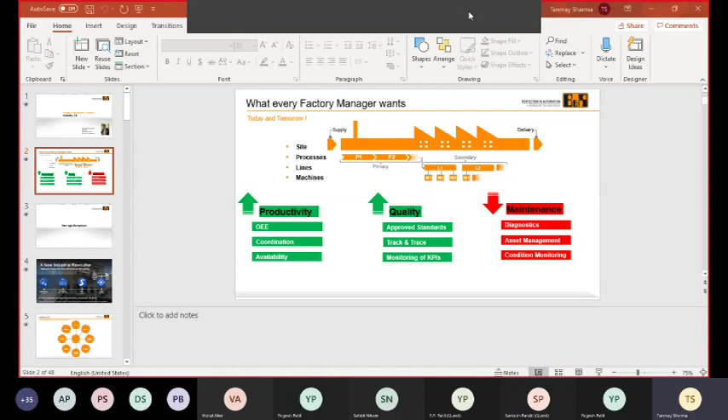Okay, thank you. So before moving ahead with our today's session, just a couple of things I would like to mention in advance. Sorry for the disturbance - there is some small construction going on near my house, so there might be some disturbances from my end. But please bear with me. I hope I'll keep this session a little bit interesting for you also, so you don't get diverted by the noise. That is the best I can do.

So thank you for giving me this opportunity to share my knowledge from the industry side with all the professors present in this session. In the next 1.5 to 2 hours, we will look at different technologies emerging in the field of automation, and how Industry 4.0 is playing its key role in industry development in today's world - especially during the last 1.5 years, during COVID, how Industry 4.0 is making things better for us in industry.

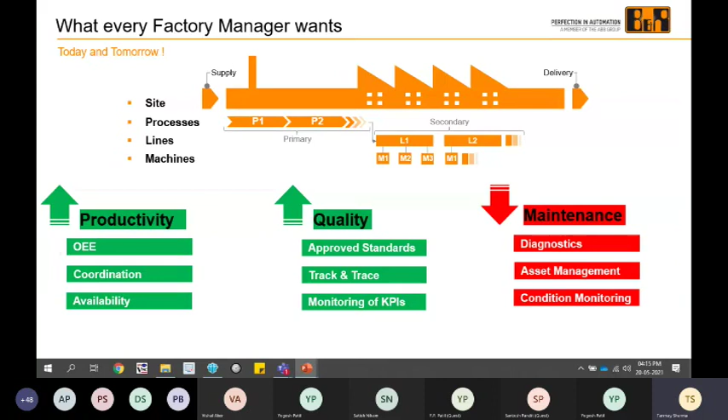Point two, I have to do advance maintenance of the machine in order to make sure it does not get shut down during the high requirement period. So these are a couple of things which every factory manager wants. Today in our presentation, we will be learning how to achieve these 3 goals by using Industry 4.0.

There was a time in the 18th century when we used to work on steam engines and steam applications, and then we moved to the mass production concept, where a single product was manufactured inside a machine without any alteration, for a huge quantity. Then came the concept in the 1970s where robotics came into picture, and mass production was converted into what I can call customized production.

I would just want to share one example. If you go on the website of Cadbury, you will get an option to customize your own gift for your friend, family, or anyone you want. Just imagine how many chocolates are being manufactured in one day. Let's assume 1 lakh chocolates. That means a machine is producing 1 lakh items per day, and all these items are different from each other. You can put a photo of your friend on that, and write a message about them, and that will get delivered to that person. So imagine, 1 lakh products manufactured in one day, and each one different from the other.

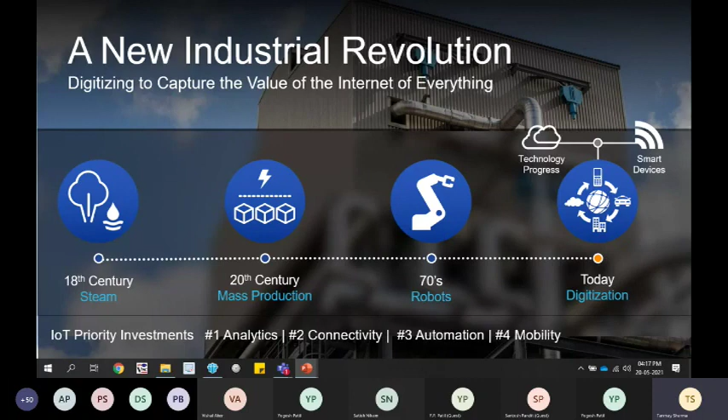There are different ways in which Industry 4.0 can help different types of applications in the industry. So we are going to discuss these basic 8 parameters through which we can take care to increase our productivity, increase our quality, and decrease the maintenance time. Let's get started one by one and see how they perform.

So first of all is scalability plus. Now, one concept here which I would like to mention to all of you, or rather a question to all of you, I want this session to be interactive, so I would expect some answers from you all also.

In March 2020, the production of sanitizer in India was 8% of the amount of production India is doing today in the field of sanitizers. Can anyone explain, let's say if 8 lakh bottles of sanitizer were produced by January or February of 2020, from 8 we moved to 100 within 1 month. How was that possible? And believe me, this was the time when there was a lockdown, a lot of companies were not functioning at that particular time. But then how were we able to move from 8 lakh production to 100 lakh within a month during the lockdown? So any suggestions, what was the concept behind that?

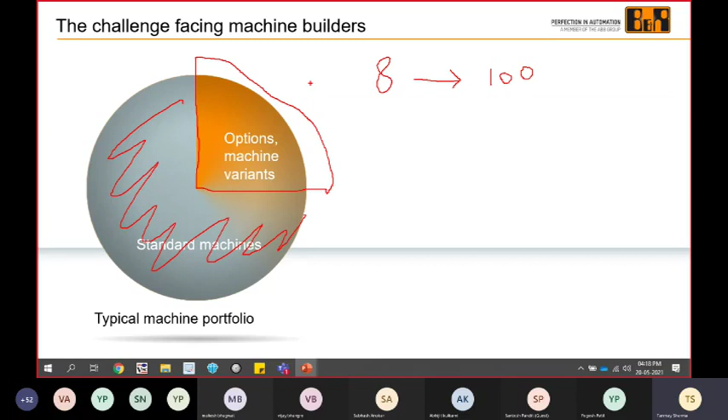So this is how the industry used to work earlier. But with time, with the concept of scalability plus, we have moved to a newer concept. And the reason we did so is, first of all, the variety of consumer products.

Earlier we used to get only one type of Parle-G biscuit in the market. Today, if we go to the market, there's Parle-G, Parle-G Gold, and Parle-G Milk. And the same is true for all brands. Earlier there was only one Dairy Milk chocolate, a simple Dairy Milk.

But today we have Silk, we have Bubbly. For Valentine's Day we have a new product, for Diwali we have a new celebration product. So the variety of consumer products coming into the market is one reason we want our application to be scalable - meaning one machine can do different tasks depending on the requirement.

The second reason is special end customer requests. Today, I can go to a Cadbury website and order a special product for my friend or family. And this is the trend right now.

If I'm working in my office today and I want to order a platter, I want specific content in my food plate. There are a couple of websites where I can choose what all I want in my food plate and order it. These are the special end customer requests coming up in the market. That is the second reason.

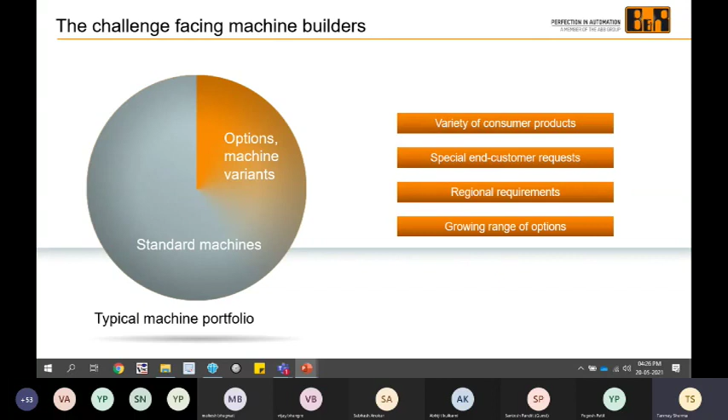So now we have moved to that particular concept where only 25% of the machine is the standard part, and the rest 75% is customizable. That means if I'm trying to make a small chocolate, I can do it with my same machine. If I want to make a big chocolate, I can do that also, and all these features are available within one machine. This is the concept of scalability which the industry is following right now, where we are focusing on not building a machine which is application specific, but machines which are concept specific.

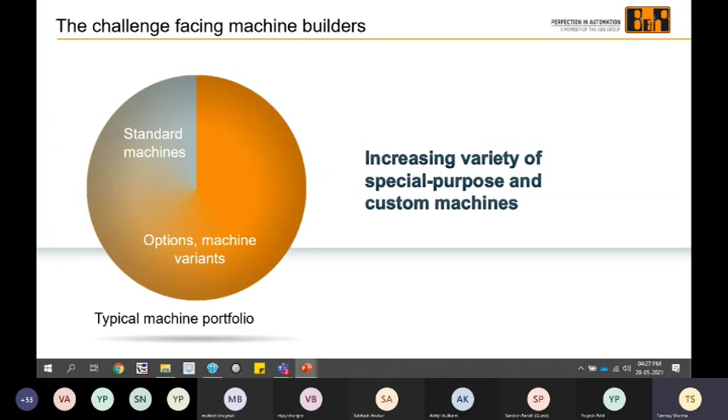So this is one area where Industry 4.0 is getting implemented, because of the increasing variety of special purpose and custom machines. Because of this concept, we were able to fulfill the sanitizer requirement. Now the concept here is that my cost of a standard machine is huge. One simple CNC machine can cost up to 5 to 10 crores of rupees.

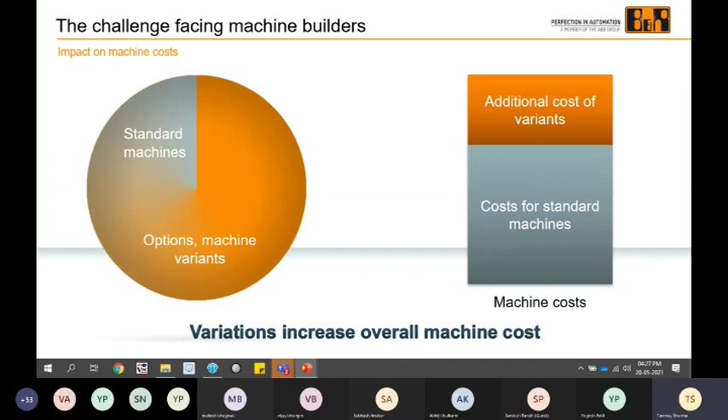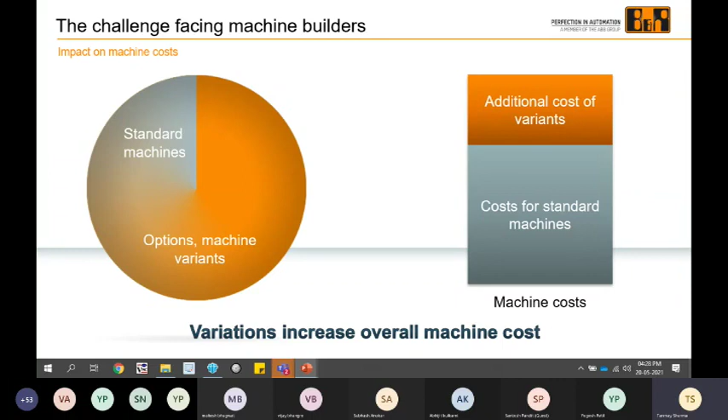So buying a new machine every time there is a new product is going to be very challenging for any factory owner. So what we do is keep the machine as basic, but the variants we change cost just a small amount compared to the initial machine cost. If I want a CNC machine to do drilling, I just change the tool in front of the CNC handle. If I want to do welding, I just change that particular part, not the entire machine. This is the concept of scalability plus, which industry is following right now.

The next and most important part is simulation and digital twin. This is a concept through which industry is trying to do R&D and testing for simulation purposes. Earlier, everyone who wanted to work in industry wanted to work on hardware, because they said the more you work on hardware, the more you learn. But today industry is again moving back to the concept of simulation.

Let's take a simple example. I want to design a motorbike. I make a layout on paper, do some sketching, and order the parts. Once my bike is manufactured, let's say I put a 50cc engine in it, though it's very low, but let's say I did it. My friend comes to me and after a test ride says maybe a 100cc engine will be good with this bike. So I order a 100cc engine, that's extra cost for me, and I fit it in my bike. I realize the performance of the bike increased.

Now because the performance increased, I want to test a 150cc engine in the same bike. Again the performance will increase, and so forth, and I will keep doing R&D. Every time I do R&D and testing of my machine, I come up with new things I can improve. But remember, because I'm developing the machine in a physical manner, I have to order every time I want to make any changes. So that is a huge cost in the form of R&D, plus also extra time, because if today I order a part of the machine, it's going to get delivered maybe in 15, 20, 25 days. So there is an extra delay.

Now, why is digital twin beneficial? First, it has a shorter TTM, that is shorter time to market. That means if designing a machine took me 1 year, today I can do it within 5 to 6 months. I can design my machine on a software, just by drag and drop choose different parts and see how the performance changes. Once I'm satisfied with my machine on a simulation platform, I can start building it on a physical level, and since I'm satisfied with the performance on simulation level, I won't have any problem with the physical machine. So shorter time to market is point one.

Better ROI, that is better return on investment. That means I have to order the mechanical equipment only one time. Whatever changes I was supposed to do, I already did in the software, in order to save money.

Higher OEE, that is overall equipment efficiency. How we increase this with this application is, let's say I design a machine and I don't even know that if I change this particular part, the efficiency will increase. I cannot play around with my R&D work if I'm doing it physically, because what might happen, let's say I'm working for a company, I order a very costly part, fit it in the machine, and realize it is not working, and the company will ask me tomorrow why did you even order this, it's a waste for us. So efficiency-wise, when doing it in simulation, there is no harm if I put any random part and check the efficiency of the machine, it might work. So I'm getting the best efficiency of the machine if I'm developing it on a simulation mode.

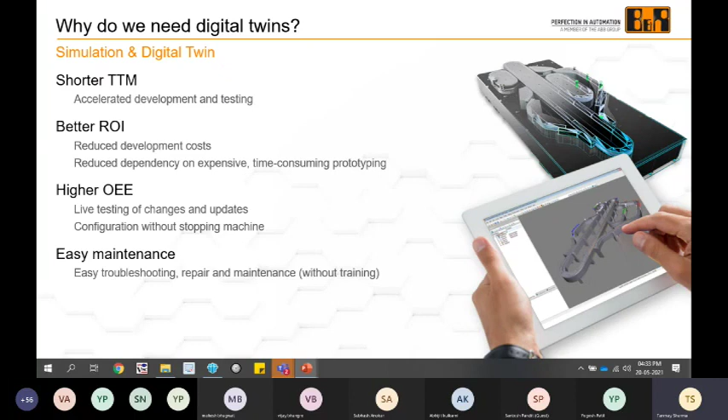So because of these advantages, the industry is moving towards a concept called digital twin. Now, when we are designing a machine on digital twin, we are generally talking about three different phases of the machine, or three different parts of commissioning the machine on simulation.

The first is visualization, that is creating the visual effects of the machine. The software we can use for this, our very own, very famous one used in our mechanical department, is AutoCAD. Very simple. Second, optimal sizing and layout.

That means I have to tell the machine, for example, if two parts of the machine are getting dragged against each other, what is the friction between these two surfaces. These are kind of the physical parameters I'll be giving to the machine. So first is designing the skeleton of the machine. Once the skeleton is designed, I have to give physical parameters to that skeleton in order to give life to that particular model which I have developed.

And the last part is the software, where I write the software to automate that particular machine. Okay, so these are the three different parts.

Now, the software which we use for all these three - first, as I mentioned, in the visualization in the early phase of designing, we talk about animations, flow of material, and collision avoidance. In optimal sizing and layout, we talk about kinematics of the machine, physics of the machine, dynamics of the machine, force, torque, speed of the machine. And lastly, software - we talk about software testing, software functioning, migrating to the real machine, and all these topics.

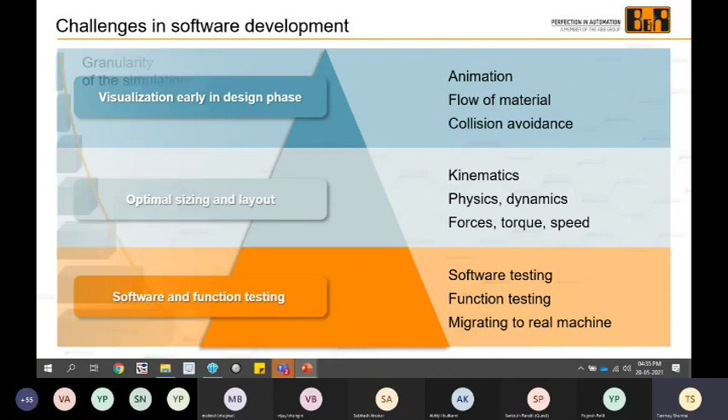The software we use for all this is kind of very common. For example, for process simulation, we use AutoCAD, we use Industrial Physics, we use DCS, CATIA, and long time back we used to use WinMod. So these are a couple of software through which we can design the physics of a machine.

Moving ahead, now there is a concept of machine simulation.

This can be done by MapleSim, by the very famous MATLAB and Simulink, and by Modelica. These are a couple of software which put life into the model we have produced. Then there is the hardware simulation part, where we run the machine in simulation mode, making the machine operational in simulation mode, and that can be done easily by Automation Studio, which is a software by B&R through which we do this particular task.

So just imagine, students who are in college, professors can give them this idea, make a team of 3 students from mechanical and 3 students from instrumentation branch, and ask them to do collaborative work where the mechanical student develops a model, and instrumentation students do the kinematic part and the automation part. So digital twin is a great concept where things are done in simulation mode.

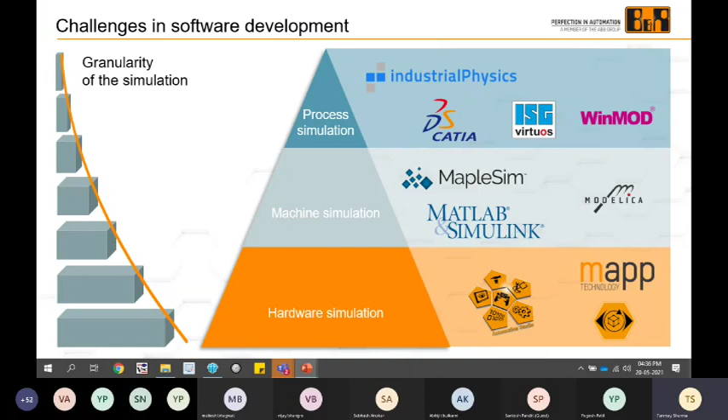So let me share one example. Recently, I think last year, 2020, we got an order from one of the pharmaceutical companies in the market. Because vaccination was going to be a huge thing in the market, there was a high demand for injection-making machines. So we got an order to design a machine which can do this particular task.

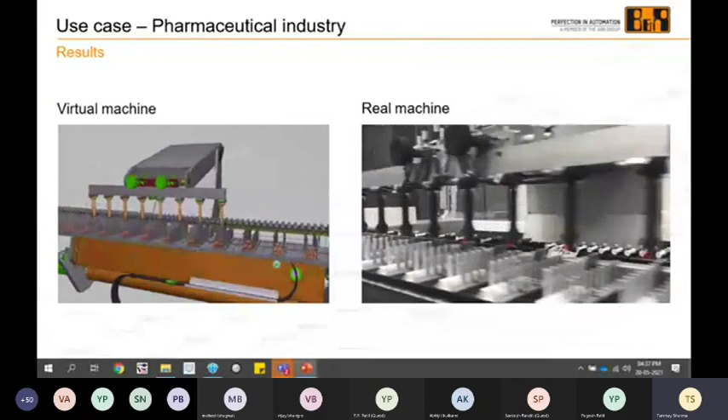So what we did is that before manufacturing the actual machine, we tried to make a simulation mode of the machine. For example, what you can see on your screen towards the right hand side, we have a real machine working, where palletizing is happening. A robotic arm is picking up and placing injections in the packing tray.

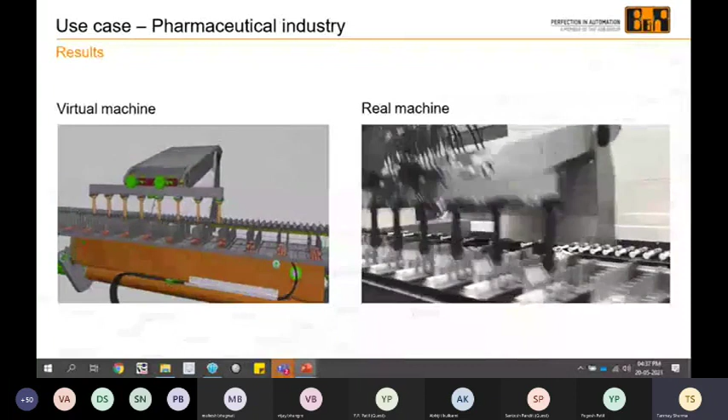But before designing this real machine, we designed the simulation of this using iPhysics, using MATLAB, using Automation Studio. We designed the same. And after doing all this testing on the virtual platform, we went ahead and created a real machine in a single shot, without any R&D needed on the actual hardware. So this is one application I can tell you about.

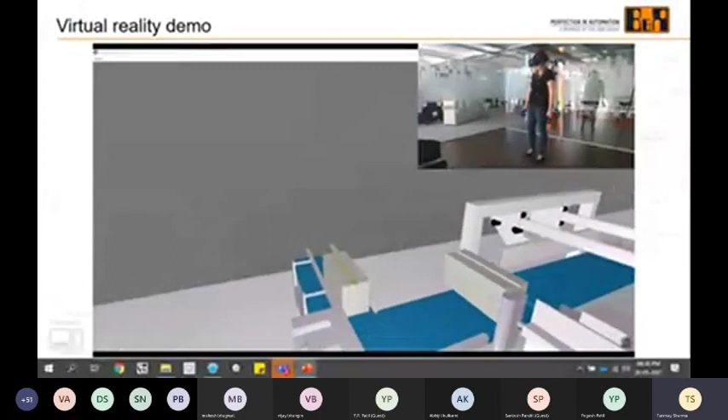Now this is another application where a person is using digital twin in addition to AR and VR, that is augmented reality and virtual reality. Without the presence of a machine, the person is able to test this particular setup. And not only test, you can pick up and place the boxes, you can do alterations, you can change anything required in real time. So this much amount of complexity digital twin can handle.

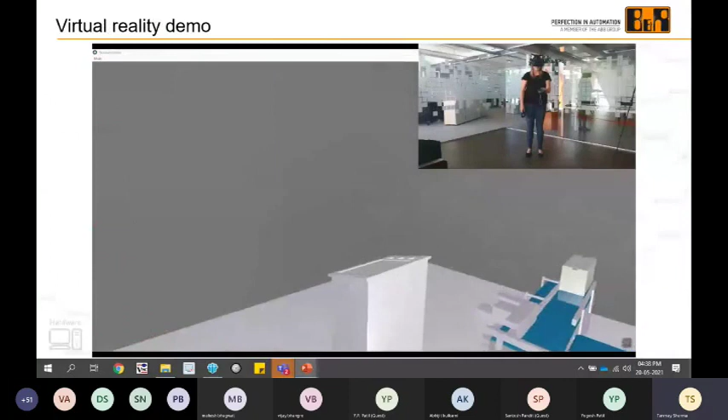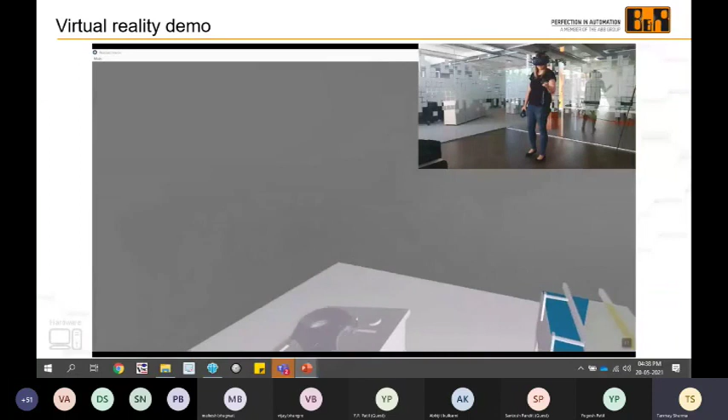So I will run the video once again. The advantage, again, I will mention, is that without even investing a single rupee on hardware, I'm able to design the entire machine. And once I'm satisfied with the machine functioning, I can actually go ahead and make the machine in offline mode.

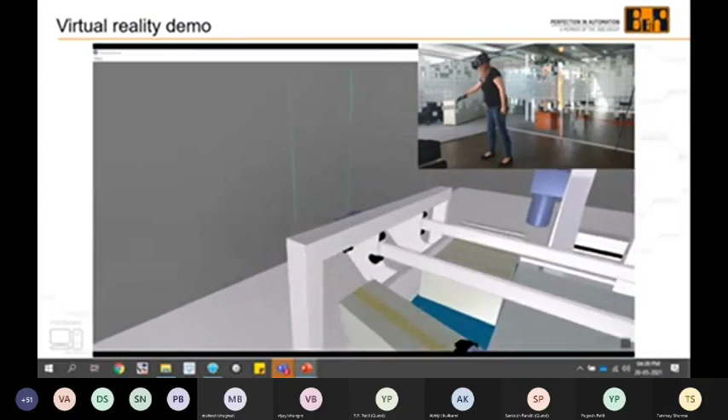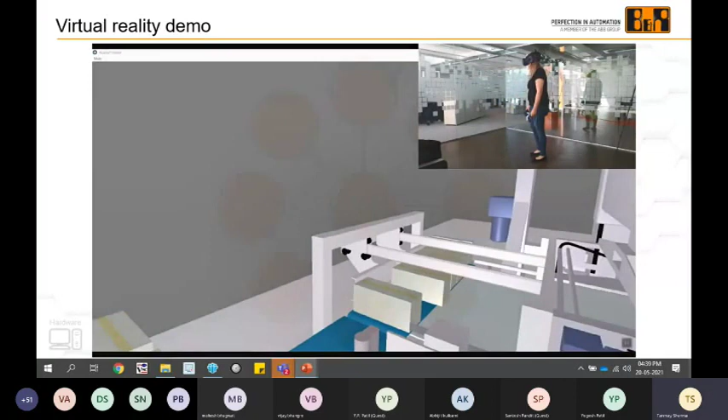So this is the concept of digital twin, which is again an entity of Industry 4.0 and widely used in industry nowadays. Third is web-based HMI.

Now first, let me introduce what is HMI. Every machine, every manufacturing entity, needs to communicate with humans. That means if I want, I should be able to start the machine. If I want, I should be able to stop the machine. And all the commands a user gives to the machine are through a screen called the HMI screen.

That is, human machine interface screen, HMI screen. Every machine is connected with a screen which is available for the user to start the machine, stop the machine, change the parameters and all these things. So the commands from the user are taken through the HMI machine, HMI screen.

Now this HMI screen plays a very important role for the machine, because a machine with all the features is useless until and unless the user is able to control the machine.

Earlier this HMI used to be intact with the machine, but now we are following a concept where this HMI screen can be moved around. That means, let's say if the machine is in the factory and the manager is sitting at home and wants to run the machine through his mobile, can we bring that HMI screen from the machine to his mobile?

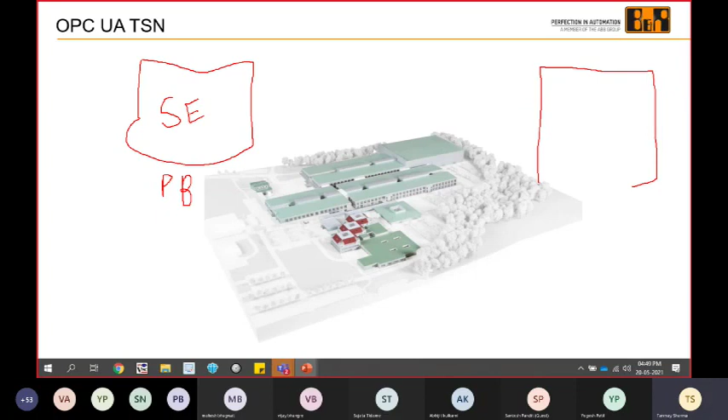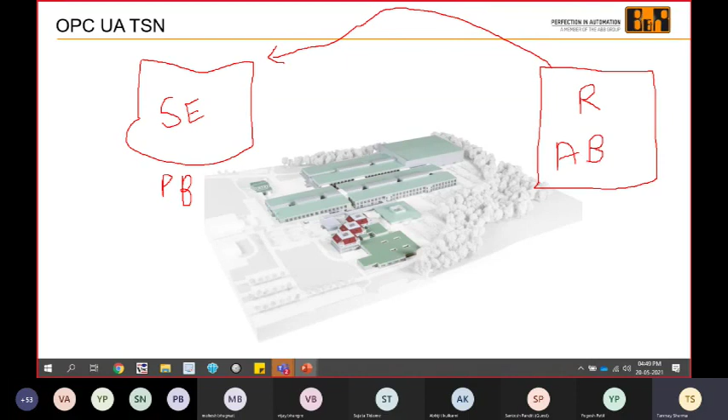So let us take an example that there is a machine. This machine is designed with a Siemens controller, and this machine works on the Profibus communication protocol. Let's take this example. Now there is another machine, or let's say a robot. This robot has to work with this particular machine - whatever production this machine is doing, the robot is supposed to pick up the item and place it in the pallet. And this robot is by ABB, one of the biggest robotic manufacturing companies today, and also B&R's parent company. So let us say there is ABB.

Now let's say ABB is working on a communication protocol X, and then there is also a third machine doing some task in this process, and let us say this is with B&R - it has a B&R controller in them. Now, B&R works on the communication protocol called PLK, that is POWERLINK, the fastest communication protocol available as of now. And a lot of other companies are also using PLK.

Now, if I give you a situation where there are three friends standing together, one knows only Punjabi, one knows only Marathi, and one knows only Telugu - can they communicate with each other? The answer is no. They cannot do it because they do not know a common language. So we came up with the concept of communicating in some standard languages. In the same way, in industry, the same problem happened.

Another example I would like to take before this. Do you remember a time when Nokia phones used to come with thin pin chargers, round pin chargers? Earlier there was a round pin thick charger, then Nokia came with the round pin thin charger. At that time, Samsung was using its own B-type port chargers. Apple used to have a different charger. Sony Ericsson used to have a different charger. Lava was using a different one, and so forth. Later on, what happened? The entire industry moved towards the B-type charging port.

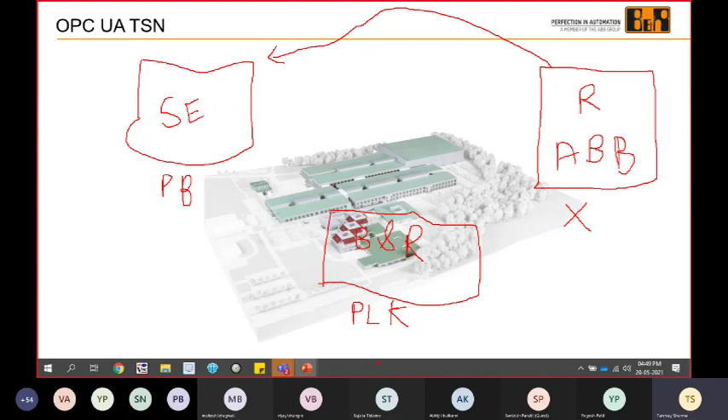In the same way, industry was facing this problem where every controller manufacturing company had a different communication protocol. So inside a factory, if there are 5 machines from Siemens, 5 from ABB, and 5 from B&R, they were not able to talk to each other. At that time, the industry came up with a concept called OPC UA over TSN, a standard communication protocol developed by OPC Foundation, backed by all the companies in the industry - ABB, B&R, Mitsubishi, Siemens, Rockwell, Omron, Fanuc - all came together to help OPC Foundation develop this protocol.

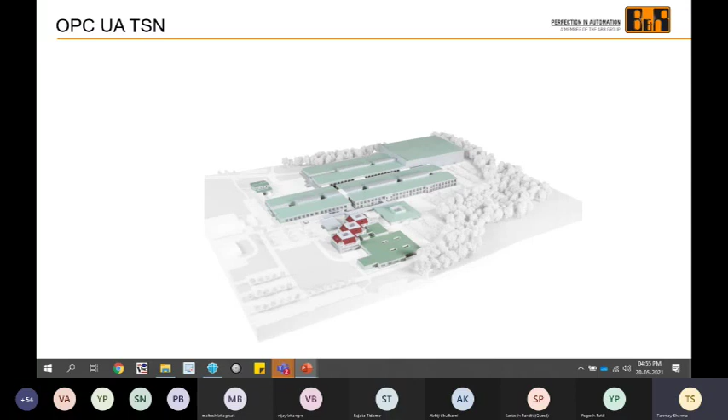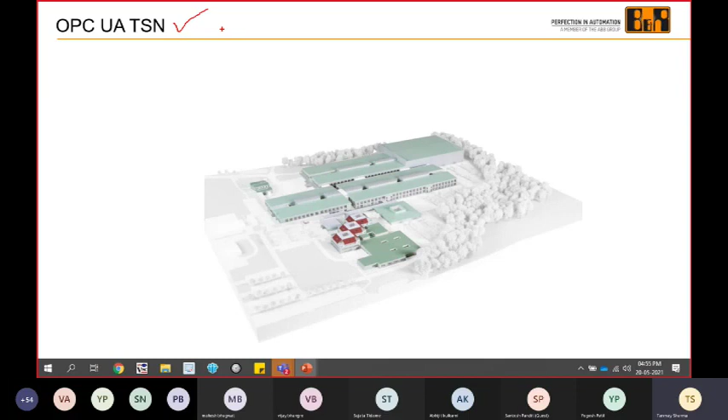Later on, an advanced version came as OPC UA over TSN, and this communication protocol is mandatory in all PLCs. Any manufacturer - Siemens, Rockwell, Fanuc, ABB, B&R - all these controller manufacturers have to include OPC UA communication in their PLC. Other than that, whatever they want to do - Profibus, Profinet, PLK, Ethercat, Ethernet - let them do it, but OPC UA is a must. And because it's mandatory, the industry is booming for OPC UA. There is high demand because this is the future of communication.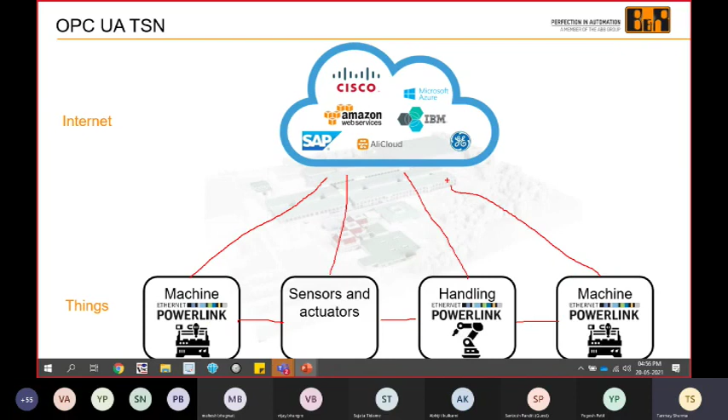At a factory level, there are different machines available - sensors, actuators, robots, and other machines. In order to create interconnectivity between these machines, and also between these machines and the cloud, we use OPC UA. And we widely use it because it's a standard communication protocol.

So now I don't even have to waste my time figuring out which communication protocol Siemens' machine is on, and which protocol another machine is on. I can simply go ahead and use OPC UA, no matter the manufacturer. Now, OPC UA is something more than just data - first of all, it is an open international standard, widely accepted by all companies, and it deals in terms of information, not data. That means if I publish this data in front of your eyes, you won't make any sense out of it.

This is how machines communicate with each other, but OPC UA will give you information, not just data. Third, end customer demands - if I'm an end customer, let's say HUL, manufacturing different products for the market, I don't want to break my head over different machines. I don't care if the machine is from Siemens or B&R. What I care about at the end of the day is that my production should happen. That is where OPC plays a key role.

Then plug and produce - that means if today I'm using an ABB robot and tomorrow I want to switch to some other robot, I can just remove the ABB robot, bring another robot, and plug it in, because I know it is communicating on the OPC UA platform. That means communication will be possible with any other robot also, so plug and play can be done. And in 2018, it was the largest ecosystem - the maximum machines in the market were using OPC UA.

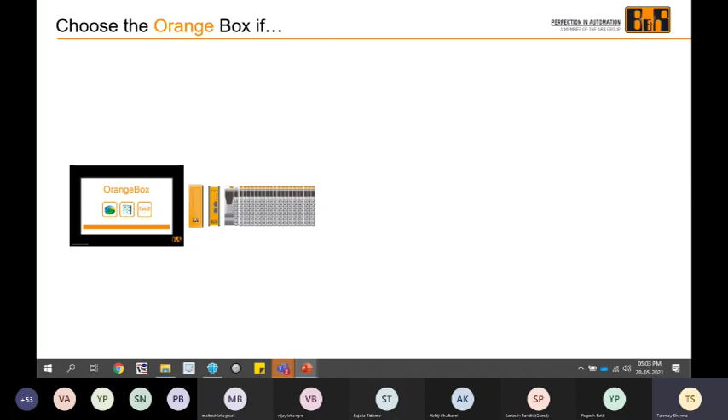So industry started thinking about a solution where brownfield industry means old industries which are not capable of implementing Industry 4.0, and greenfield industry means industries which are new and are capable of implementing Industry 4.0. So industry started thinking, can we have a solution which can change a brownfield industry into a greenfield industry without changing the machines? And that was done by Orange Box.

Orange Box is a solution which gives you an extra platform which resembles Industry 4.0 and gives you all the benefits of the same. For example, the concept of OEE, overall equipment effectiveness, came in Industry 4.0. But if I want to implement OEE or check OEE for old machines which are very obsolete, I can simply install Orange Box with that old machine, and my machine will be able to give you that particular data. My machine will be able to communicate on OPC UA. I can access any data and analyze it on Orange Box.

So this is a technology which is widely used in the industry, because believe me, India is a manufacturing space where we are very fond of doing less investment. Industry moved very fast in other countries. When we talk about manufacturing in USA, Europe, China, manufacturing moved very fast and the changes were brought in very fast, but India is somewhere down the line lagging behind. For example, the concept of Industry 4.0 came in the year 2007 or 2008 in other countries, but in India the concept of Industry 4.0 started coming in year 2015. So you can see the delay.

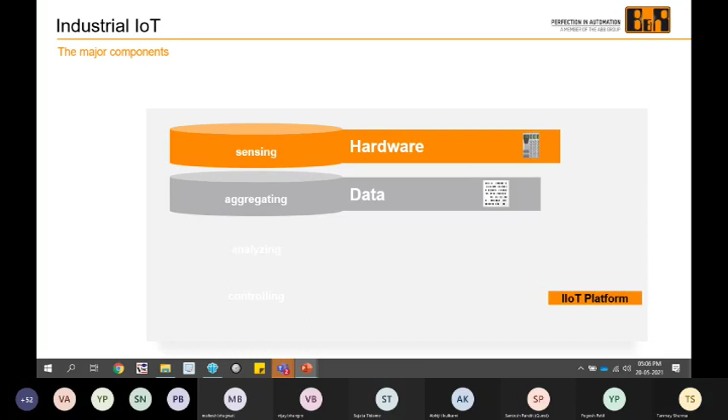Second is aggregation of the data. Third is analyzing the data. And fourth is controlling the machine based on the data. That means I'm going to collect the data from the machine, analyze the data, check whether everything is working fine or not, whether the production is fine, the speed is fine, there should be no damage to my machine, and if anything needs to be corrected, then I will take action on that. So that is called a closed loop production. And this is nothing but a part of OEE.

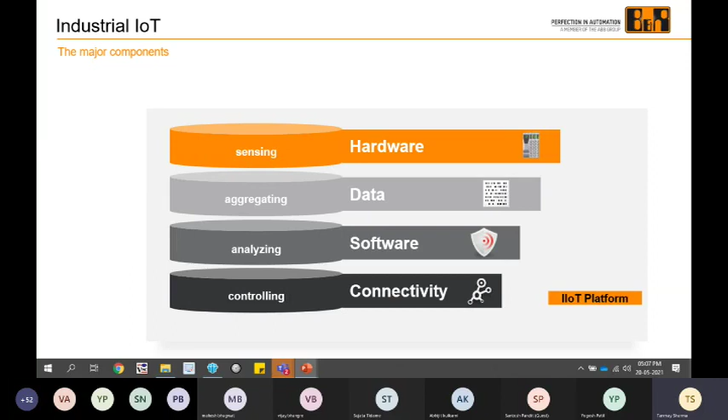Now, for process automation, I can say the different features of Industry 4.0 are these. First of all, controlling the data, or rather controlling the machine. Second is providing security to the machine. Third is providing internet connectivity to the machine. Fourth point is data aggregation from the machine.

Fifth point is data historian. That means creating, or I can say, keeping saved the older data. That is also a part of Industry 4.0.

Is it fine for me to run at that speed? Is it fine for me to run at double the speed? If not, I can face a couple of small losses in production, but I cannot face the loss of damaging the machine. So I have to provide this intelligence, or the mind, to the machine, where it should be able to communicate with me and tell that, okay boss, this is not possible. You are putting a lot of pressure on me for production. I'm not going to work at this speed. I'll restrict myself to only this speed. That is the maximum best I can do in the current scenario. So this business intelligence I have to provide to the machine.

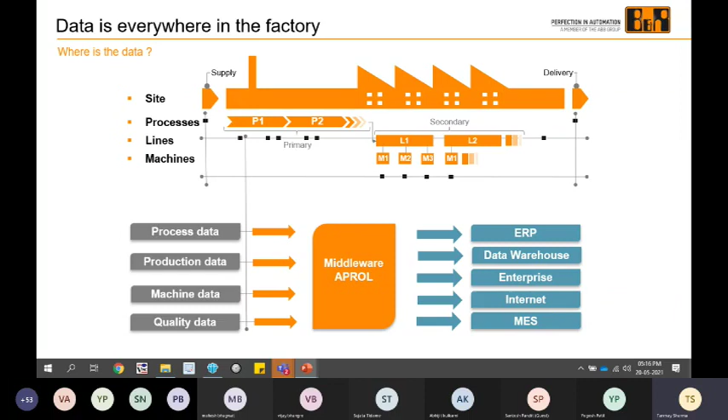And how did I come to this conclusion - that through energy consumption my machine is at danger level, or through vibration I'm at danger level, or through control cabinet monitoring parameters I figured out I'm in danger? All this happened after I analyzed the data. And the data is nothing but energy data, vibration data, and cabinet data. In the same way, this data is produced on a very huge level inside a factory, and this data needs to be analyzed in order to make some sensible decision for my machine or my factory.

This is called big data. Now there are 4 parameters on which we judge data. First of all, there is volume of data - that means scale of data, how much amount of data I have. Then comes variety of the data - that means different forms of data. For example, there is energy monitoring data, vibration data, cabinet control data, and so on and so forth.

The next front is veracity of the data - that means uncertainty of the data. How much error can be there in my data? Plus minus 1% or 0.5%? How much uncertainty is there in the data which I'm receiving. The last is velocity of the data - that means the analysis of the data.

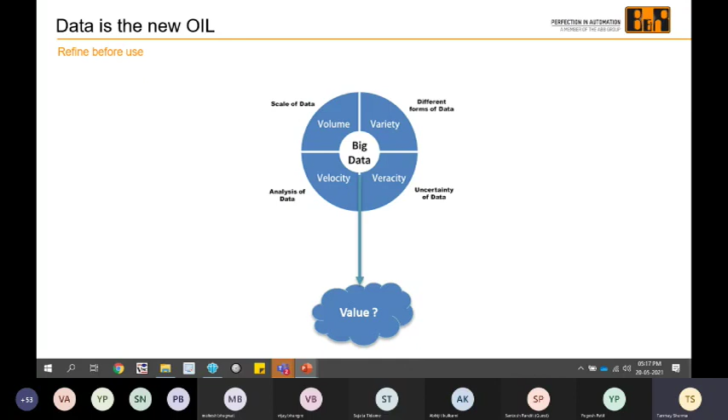When I judge my data on all these 4 fronts, I will be able to come up with a value of the data - how important the data is. If it is important, I will take it up. If it is not important, I will not reject it, but I will put it aside for the time being.

Depending on this value, how important the data is, we can do either big data analysis or simple data analytics. Simple data analytics can be achieved by machine controllers, but as we discussed in the previous slide, the orange box and different products are available with us. But if I want to go for big data analysis, I have to go with cloud services. And through these services, either by doing big data analysis or normal data analytics, we will be able to come out with certain results.

Whether my machine is fine or not, whether my production is going to be fine or not, what is the health of the machine, is any part of the machine broken or not - so that I can order that particular hardware in advance and keep it ready in case it breaks. This is one very important part of Industry 4.0. A person should be attached to the machine in such a way that we know everything about that machine. Obviously, a machine does not have a mouth to communicate its problems, but we should be able to know all these things about our machine.

One thing we should keep in mind: if one machine or one line breaks down, the entire factory goes down, or the majority of the factory goes down. And when the factory goes down, there are huge losses - losses in production, losses in salaries. If my factory is not working for 5 days, I still have to pay my employees. So these factors are very important to keep in mind.

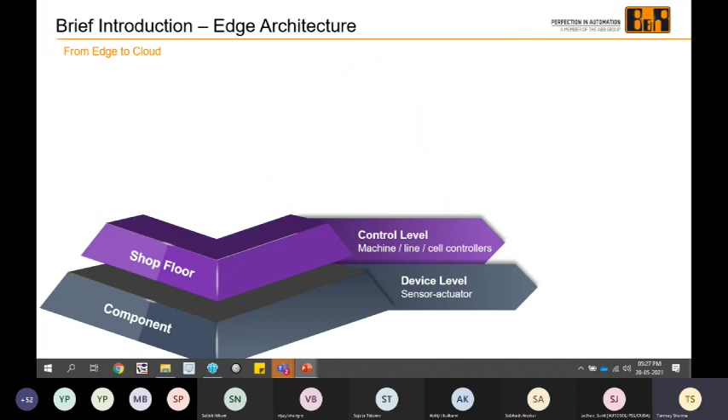The third type of maintenance is predictive maintenance, the type done by Industry 4.0. So we discussed this pyramid - this is called the automation pyramid.

We discussed this pyramid earlier, where we have different components at the lower level like sensors, actuators, and so on. Then we have shop floor data, process data, plant data, and ERP level data - enterprise resource planning data, which happens in the cloud. At device level, we have sensors and actuators. At control level, we have machine, line, and cell controllers. At supervision or process level, we have DCS and SCADA. Then we have MES level, the manufacturing execution system of the entire plant.

This data is pushed to the cloud with the help of either MQTT communication protocol, or as we discussed earlier, OPC UA communication protocol. This data pushed to the cloud can be of any type, as we discussed: energy data, vibration data, motion control data, cabinet control data, analog values data. All this data is pushed to the cloud, and the cloud analyzes all this data.

So all this data from different parts of the machine which I am collecting, I push to the cloud. Let the cloud do all the analysis and tell me that the vibrations are high, your machine needs maintenance, or your cabinet temperature is high, your machine needs certain maintenance. Not only will it tell me that my machine needs maintenance, it will also tell me which part of my machine is not working properly - for example, there is a conveyor belt running on 4 motors.

Let us say I have one motor here inside the machine, one here, one here, one here, and there is a conveyor belt going over all 4 of them. Now, the temperature of the conveyor belt from this region to this region is high, meaning the machine temperature is increasing. That everyone can know. But how will we know which part of the machine has high temperature, and inside that part, which particular place is having high temperature? If I am having high temperature here, is it the high temperature of the motor which is the problem, or is it the conveyor belt because of wrong tension being applied? All this analysis I will be able to find if I get the result from the cloud.

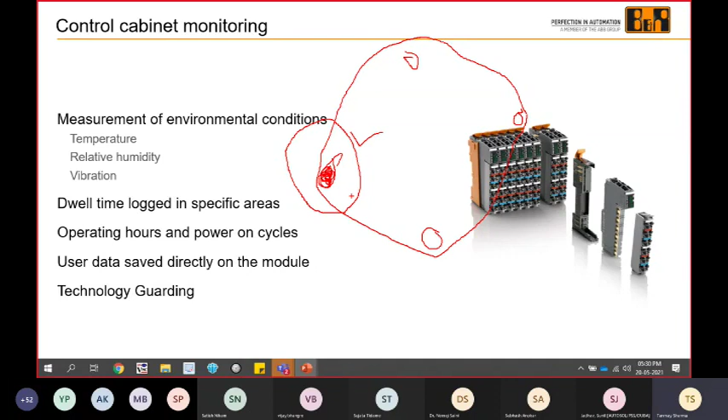And one fine day, when I have the least demand from the market, I can shut down my machine, do the maintenance, knowing that there is a Diwali season coming in front of me. So this concept is called predictive maintenance, when we predict that my machine is going to break down. This is the concept of predictive maintenance.

So for this we require big data analysis, where in future there is going to be a huge amount of data. For example, in the past we used to have 50 MB of data produced from the machine. In present, we have approximately 2.5 TB of data being produced on an average. But in future, the amount of data we are going to have from the machine is going to be very, very huge. And for that we will be requiring big data analysis. This is the place where Industry 4.0 comes into picture and plays its crucial role in big data analysis.

So this is about predictive maintenance, which we do through Industry 4.0. The last is mass customization. Now I want you all to see this particular video of mass customization, and then we will discuss it in detail.

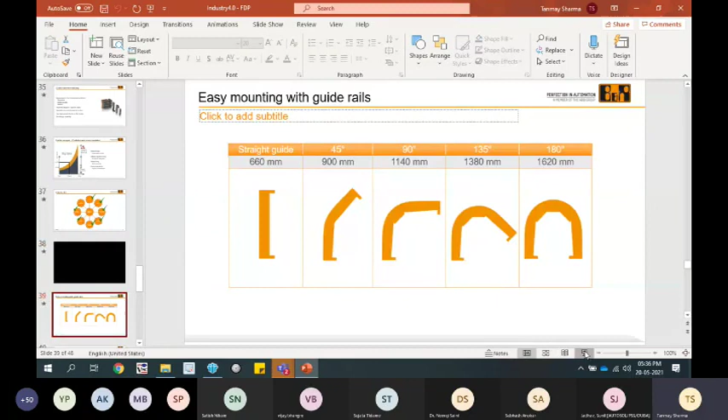About adaptive manufacturing. Now there was a time earlier when industry used to have a standard conveyor belt system kind of production. So for example, let us say this is... okay, don't look at this particular part right now, just look at the boxes I have made down. Let's say these are different manufacturing stations in an automobile company. Our first station is for placing seats, second station is for placing the bonnet of the car, third station is for placing the tires, this is maybe for paint. Some random functions they are doing to manufacture a car, for example.

Now let us say to fix tires inside a car, we hardly need 2 minutes, a robot hardly needs 2 minutes to bolt tires to the car. To fix seats, it might require 5 minutes. And for paint, it might require 10 minutes. Now there is a conveyor belt through which cars are being moved from this direction to this direction. Assuming this station also takes 2 minutes and this station also takes 3 minutes, this is the entire production line. Can anyone tell me how much time will I require to produce one car?

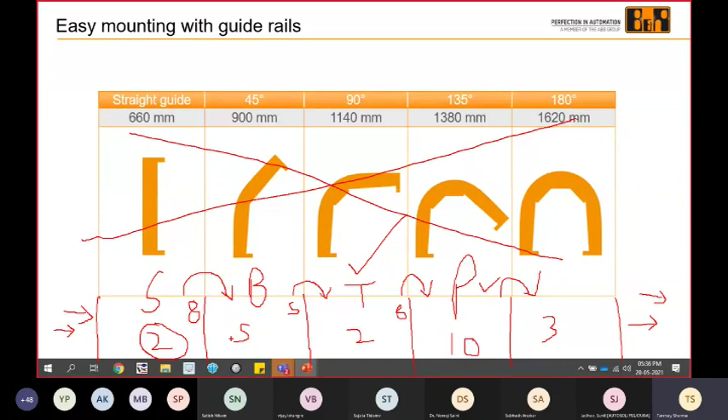Because I have the conventional conveyor belt system. That means either everything will move forward or everything will come back. I cannot control the stations individually. I cannot control the movement of cars individually if I am having a conventional conveyor belt system.

Now, in order to overcome this particular problem, we have this concept of ACOPOStrak.

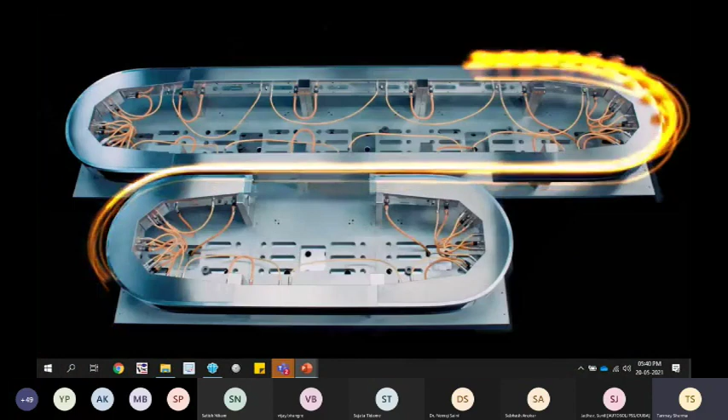Now, I will be showing you. I will be pausing this video in the middle and showing you. Okay, I can pause it. Yeah. Okay. Oh shoot, so there is a little bit of a problem with my menu bar. Yeah, so I will do it in a small screen. It will be better. Okay.

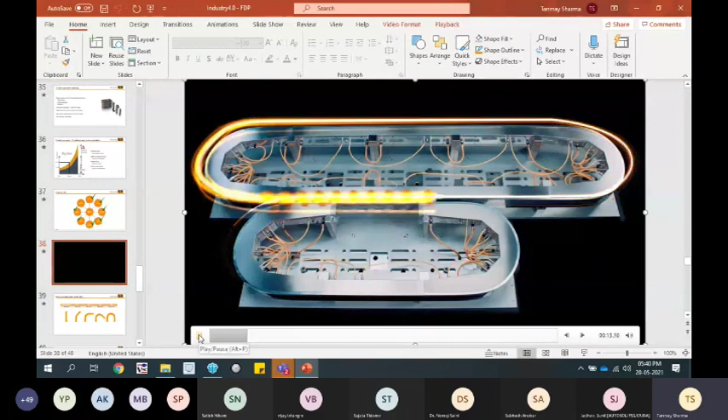So this is nothing but a conveyor belt system. And this conveyor belt system is not a conventional system. It works on the application of a magnetic field.

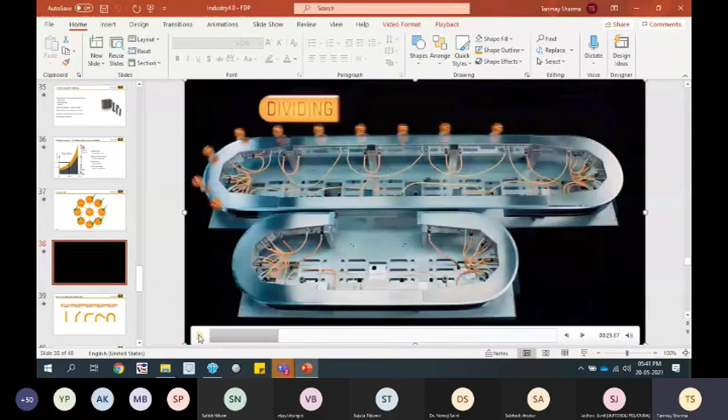Now how it works, let us see. So there is this round line which we have made, and this metallic line has a magnetic field which is holding these shuttles. These shuttles are nothing but carriers on the metal, small carriers which are holding some product. In this video, these orange spherical items are our product. So these shuttles which are running on the metallic surface with the help of magnetic field are called ACOPOStrak.

Now the advantage of this is I can control each and every shuttle individually. That is one advantage. That means I can move any shuttle whenever required. If there is a space, I can move it further.

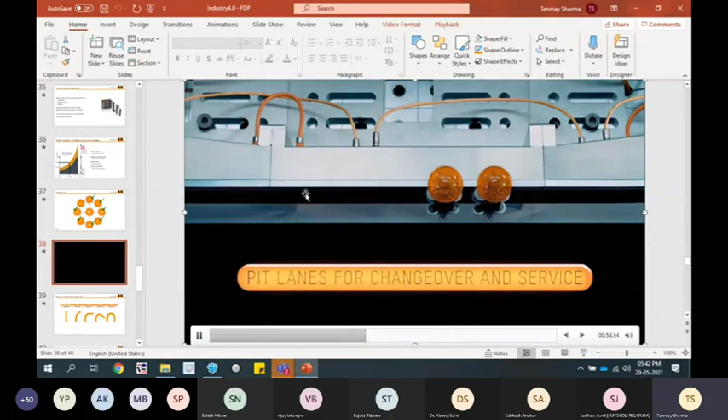For example, let us just wait for this. So this is like maintenance. Okay, I have just plugged two shuttles, and these two shuttles will go and join the production, and another two shuttles will come for maintenance. That means without even shutting down my machine, I will be able to do maintenance. This is the second application. Now, I would again like all of you to see this particular part.

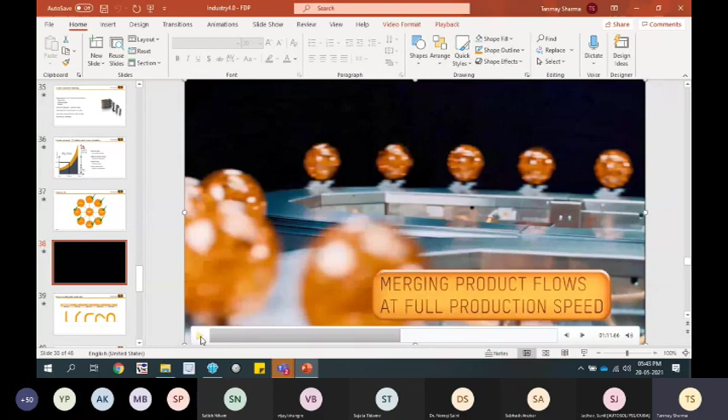Now I am getting shuttles from this direction also, and I am getting shuttles from this direction also. So from both directions input is coming, and the exit line is only one, towards this side. So there might be a collision, but because I can control each and every shuttle individually, my machine has the capability to do collision avoidance. That means they can pause themselves and wait for the other shuttle to pass, and then accordingly it can be controlled.

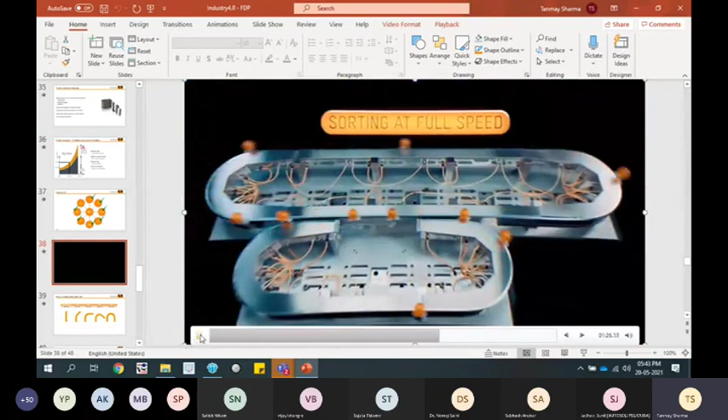Then in this particular example, let me just rewind. Yeah, so I have a camera system over here to decide whether my product is good or bad. If my product is bad, it will go in this particular line. If it is good, it will go in this particular line and will get packed.

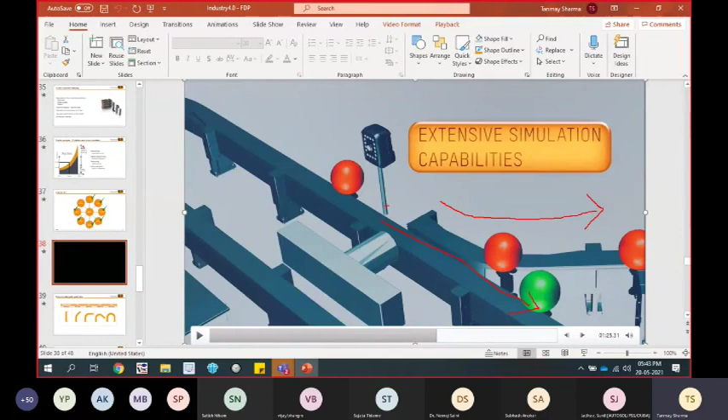Okay, so all this is individually controlled. On the other hand, if I had a conveyor belt system over here, I cannot control the diversion very perfectly. There will be some errors. Okay, so that problem can be avoided by ACOPOStrak. So this is one example of how the track technology of the industry is changing from conventional conveyor belt system to advanced ACOPOStrak.

Now another advantage of this particular technology is, if today let's say I set up a conveyor belt system, tomorrow I cannot change it because the length of conveyor belt cannot be increased or decreased, there cannot be any bends inside that, and all these problems. So for every bend I need to put a pulley over there in order to do that.

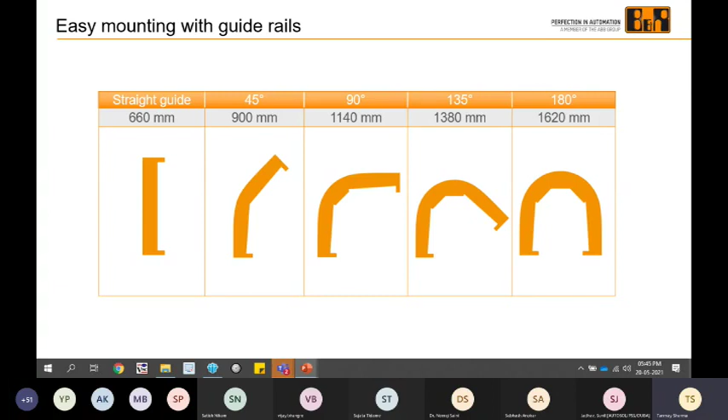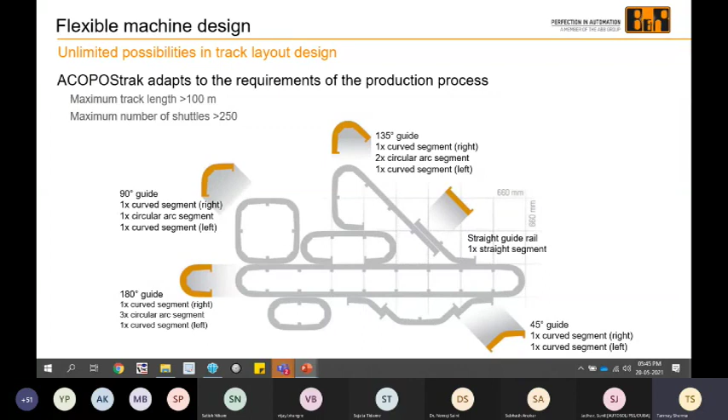But this ACOPOStrak system comes with different parts with different degrees of bend, and a track or architecture can be created based on the application. So this is flexible. So today if I want to make architecture A, and tomorrow I want to change it, I do not have to do any extra investment from scratch. Okay, I can use my old parts.

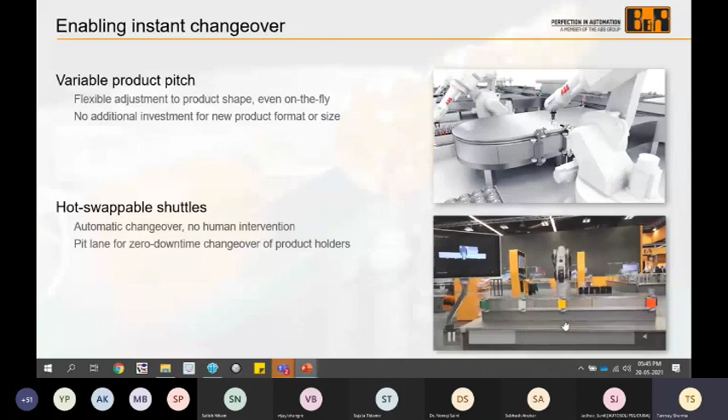So let's say this is one example. Okay, this video which is playing on your screen, there is a robot, and these shuttles are moving on the conveyor belt system. Without stopping the machine, I can take out that particular shuttle and I can replace this shuttle.

So without shutting down the entire machine, I can do the changes. Okay, so this is one application of ACOPOStrak.

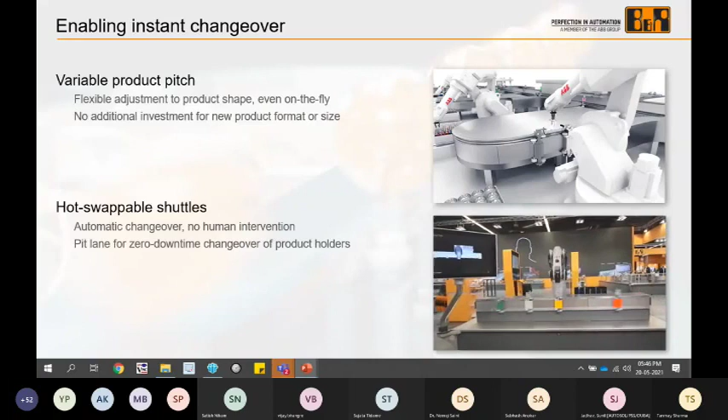Moving ahead, the flexibility part - you can build any type of architecture today, and tomorrow if you want to change, you can change it in any manner. So it is future proof. You do not need to do investment again and again.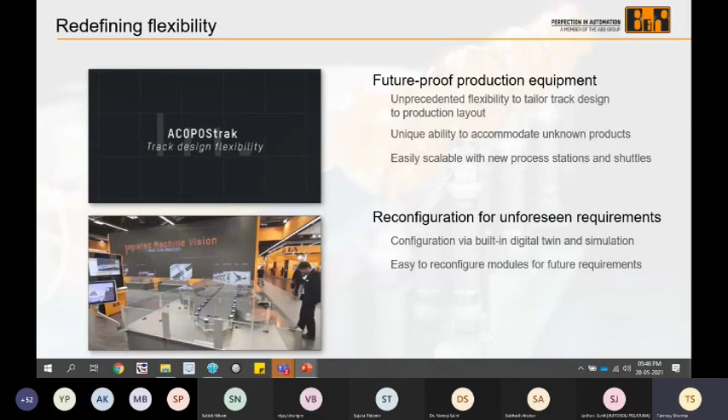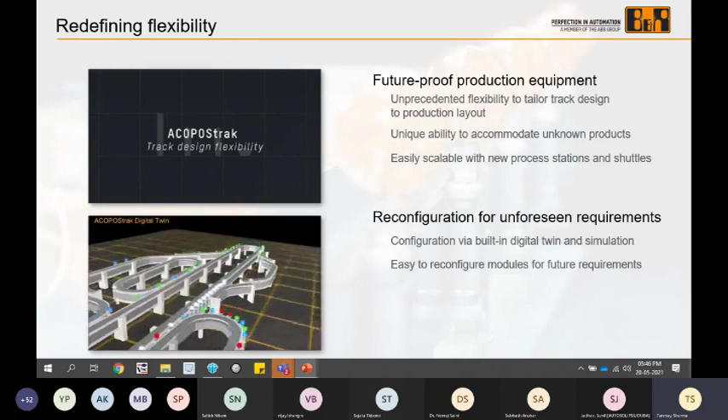The last but not the least part is reconfiguration for unforeseen requirements. That means today I might not have some requirement, but tomorrow I might need to change it, because I never know what will be the demand of the industry tomorrow. But if I have a conventional conveyor belt system, I have to do a lot of changes. If I have ACOPOStrak, I can again make it flexible.

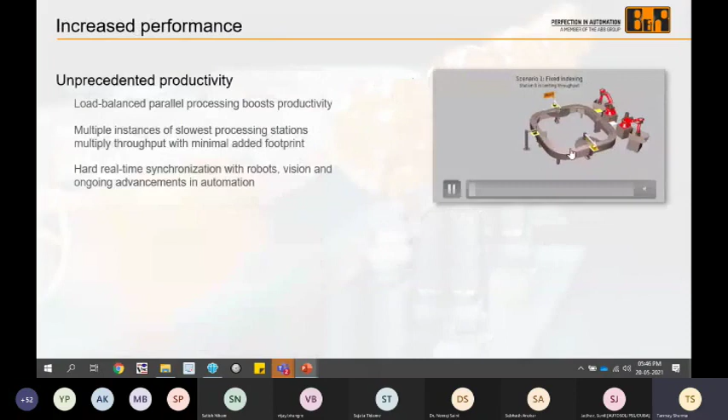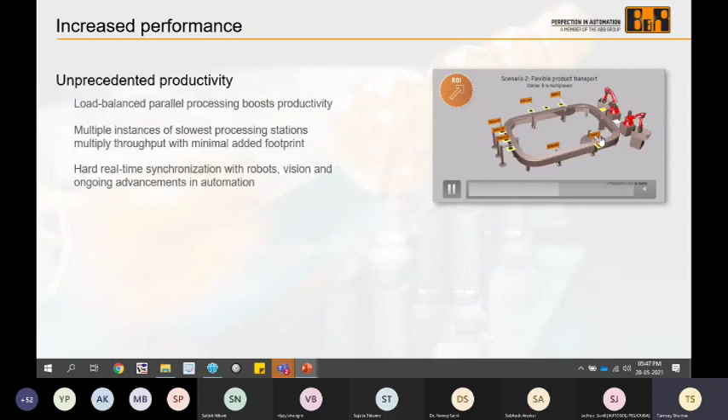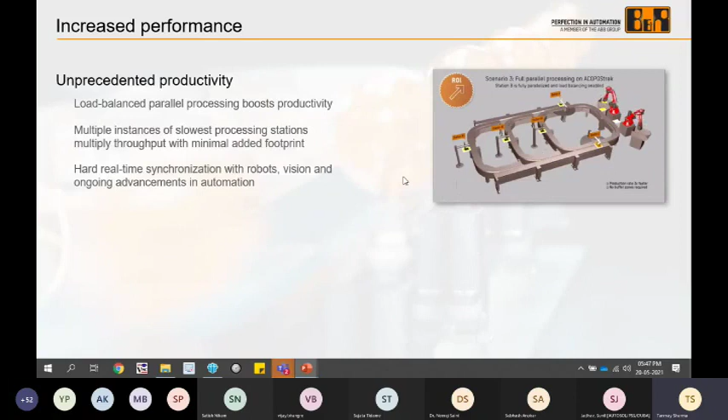For example, let us say I have 3 stations, A, B and C, doing the production. Tomorrow the production might get increased and I might face a requirement of extra stations. So I increase the length of the track, this particular track technology, and I might have stations B1, B2, B3 and A1, A2 and C1, C2. Tomorrow there might be demand for more stations, so I can have some stations in parallel, and individually I can move the items over this conveyor belt. So this is about unprecedented productivity requirement in the future.

Third, when there is a conventional conveyor belt system, there are some jerks - for example, in the top and bottom movement of boxes containing liquid. In the bottom one you are facing jerk, but the top one is doing the same task at the same time with less jerks, so there is less chance of damaging the product. So these are a couple of advantages of track technology.

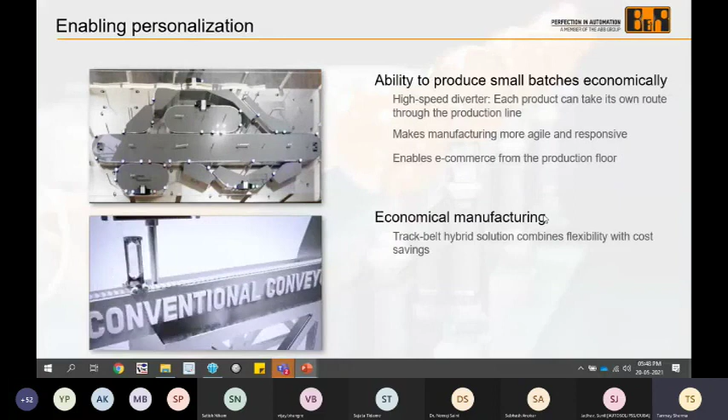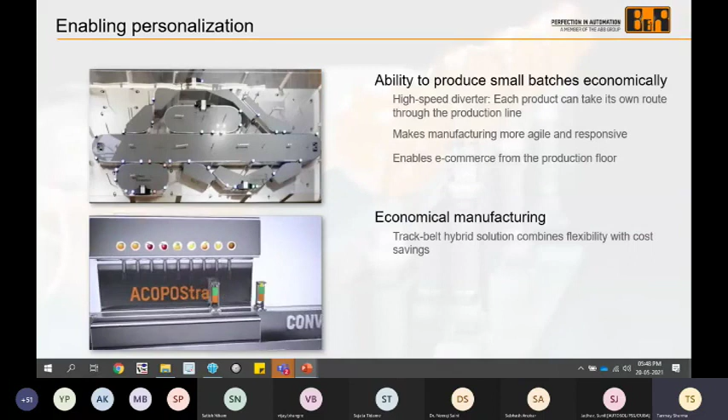And in addition to that, we have now moved beyond track technology to ACOPOS 6D. So maybe after the session you can go on YouTube and Google out about ACOPOStrak and SuperTrak - these are the adaptive manufacturing technologies we have in the market, which are Industry 4.0 enabled.

So that is all from my side in today's session. I just tried to give you an introduction about different areas where industry is working right now in the field of Industry 4.0, and all these verticals are going to be very hyped in the future, because the demand is increasing rapidly for these advanced technologies to be implemented in the industry.

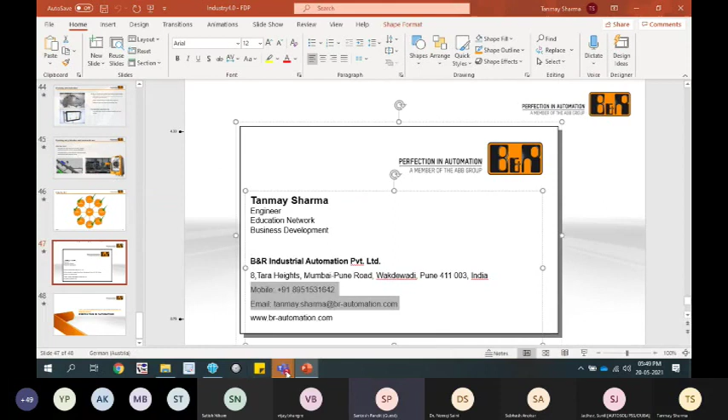Yes, thank you very much sir for enlightening us with the in-depth technical knowledge relating to emerging trends in Industry 4.0. Very conceptual session sir. In a very precise way the session was conducted right from machines to the site. How productivity, quality, maintenance is to be achieved by Industry 4.0 was explained by you in a very perfect manner - scalability, digital twin, web-based HMI, open connectivity, OPC UA communication protocol, IoT in greenfield industry, edge architecture, predictive maintenance, mass customization. Sir, wonderful session. We expect that after this session, the concepts regarding emerging trends in Industry 4.0 are very much inbuilt in the minds of our participants. So thank you very much sir.

Really, Industry 4.0 has crossed a milestone in the field of automation. Once again, I will appreciate the efforts put by you for the last 2 hours.